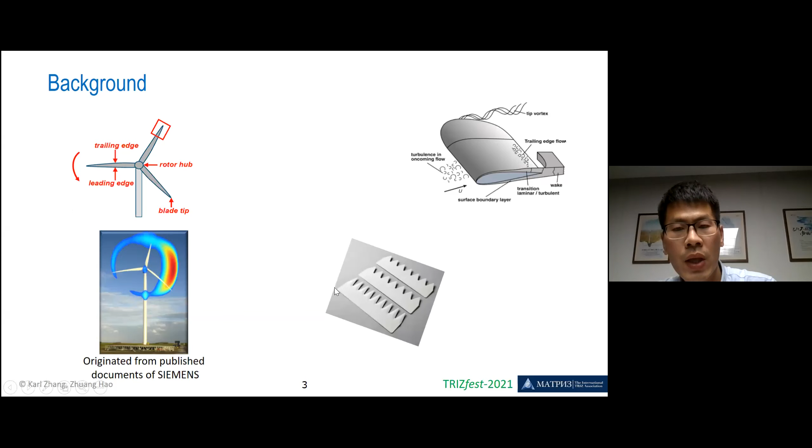But last year, a competitor's patent caught our attention. It adds more details to the normal add-ons. We can call it serrations. There are some more details, and it claims that it can further reduce the noise.

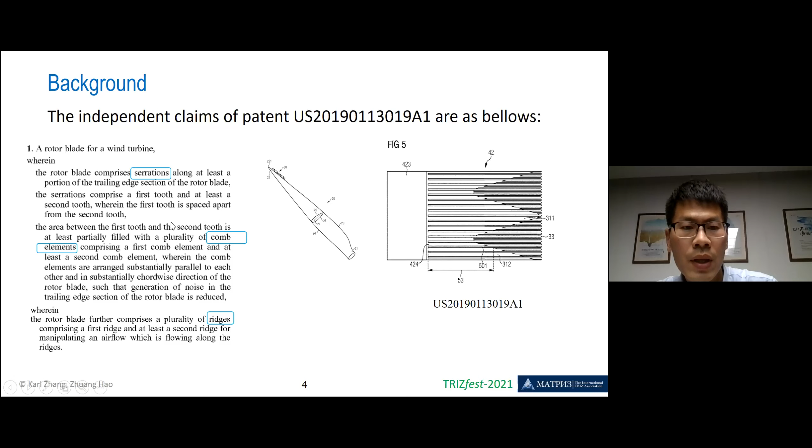So we decided to take some action. First, we read the independent claim from the competitor patent, and the patent number is shown here. Through the independent claim, we should select what components are contained in it. So we identified all the components, and the rules are the same as we learned in the function analysis.

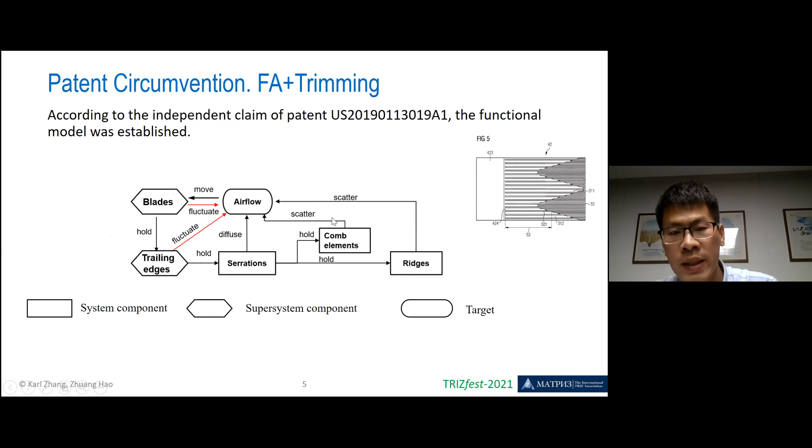Next, according to the independent claim, we built the function model. Here we can see the components mentioned in the independent claim are contained in our model. And of course, for our convenience, we can select some system components altogether. When we are doing patent circumvention, in fact, we don't need to consider whether the function is harmful, insufficient, or excessive, because that's not our aim to solve it. But here, I show the harmful function.

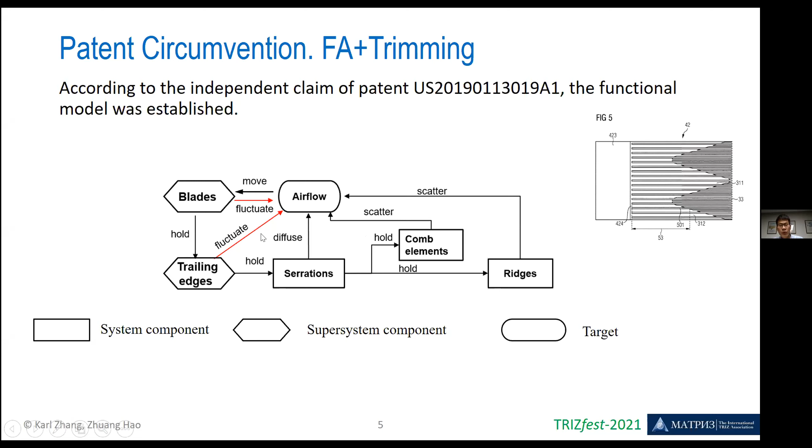When we are performing patent circumvention, trimming is the first tool that we can use. Here we can see there are only three components: serration, comb element, and the ridge. Of course, the functions are described in the patent, and we can easily add it to our model.

Serration are used to diffuse airflow. Comb element and the ridges are also used to scatter the airflow further, so the turbulence will be lowered and the noise is also lower.

Because there are only three elements, what components should be trimmed? Serrations are a normal part of the design, so it's very difficult to trim.

Here we first choose the ridge as our target to trim. The function of the ridge is to scatter the airflow. If we trim the ridge, how do we retain its useful function?

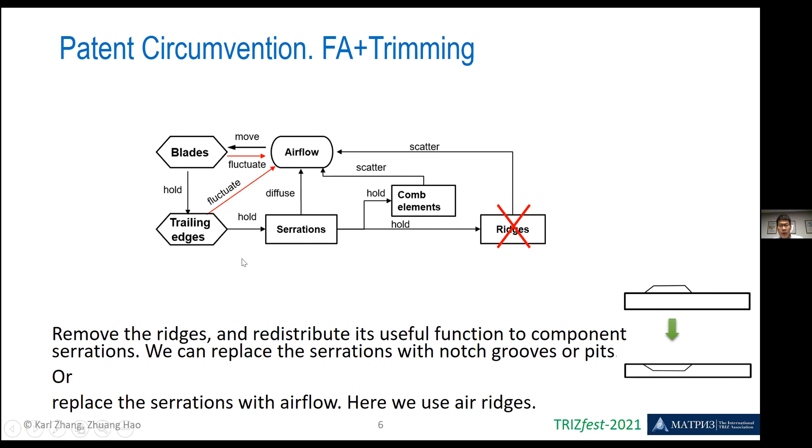Also, we can try trimming rule B. That means, how can the airflow itself perform the function of scattering itself? It's a new question we created by trimming, one that nobody else has ever thought about. How to realize it? We can see through this picture.

The blade contains a suction side and a pressure side, and the turbulence is mainly on the suction side. So how to scatter the turbulence on the suction side?

By the airflow itself. We didn't use the ridge. Instead, we use the airflow itself. We can make a through hole at the same place as the ridge.

So when the airflow goes around the surface of the blade, the air on the pressure side will go up to the suction side. It will create an air ridge, so the air itself will separate itself. Here we successfully used trimming rule B - we delegate its useful function to the airflow itself.

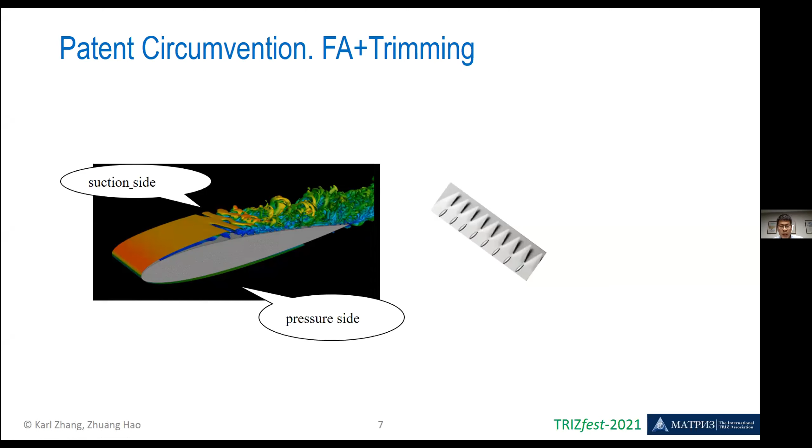Next, when we are doing a patent circumvention project, there are some attributes mentioned in the independent claim, like in some place, in what place, in what direction, or what shape. So we analyze the attributes in the independent claim.

It said that the serration are flat and along the trailing edge. If we change the attribute, can we get something good? Also for comb elements and ridges, we list all the attributes mentioned in the independent claim.

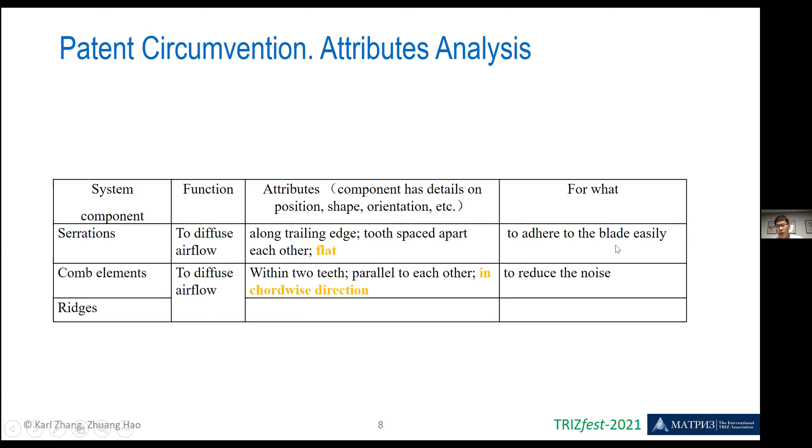We take serration as an example. In the independent claim, it said that the serration should be flat. We know from the detailed description of the patent that the serration should be flat in order to adhere to the blade easily. But we can easily think that if the serration were curved, it would withstand bending stress better. So here we get a physical contradiction.

By attribute analysis, we formulate the physical contradiction. How to solve it? Of course, we can use a separation method - a different type of separation. Here we applied separation in space. What space should the serration be flat, and what space should the serration be curved?

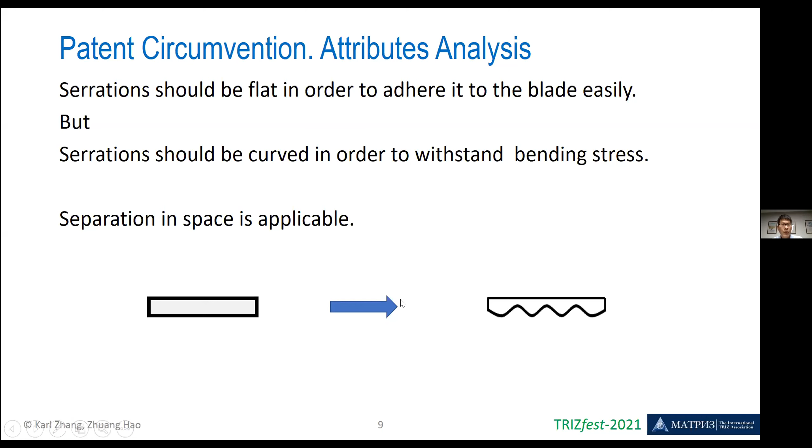In order to adhere to the blade easily, the upper side of the serration should be flat, and in order to withstand bending stress, the lower part should be curved. So in this way, we change the attribute of a component. Maybe the solution is patentable.

The next part is about another physical contradiction. The comb element should be in the chordwise direction to reduce noise efficiently, and the comb element should be downward against the chordwise direction for increasing the lifting force.

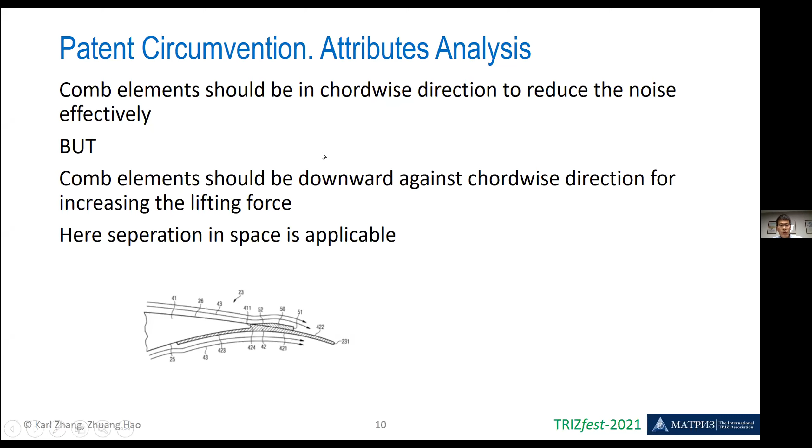Again, we use separation in space here. What space should be in the chordwise direction, and what space should be in the downward direction. And we generate the idea shown here.

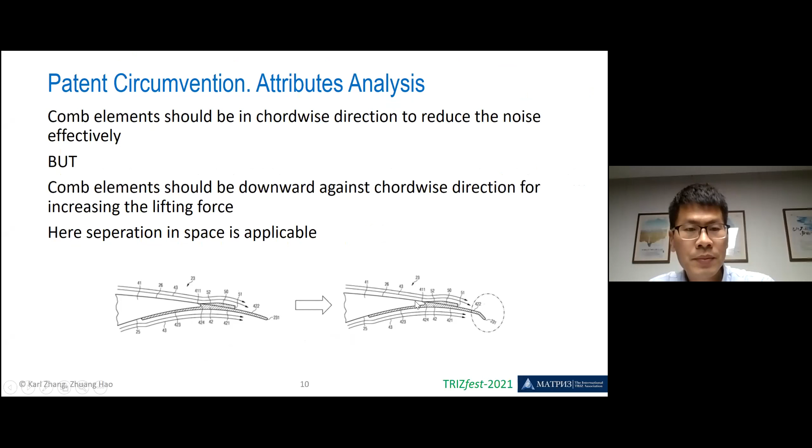And the next part is about how to strengthen our own solution, or how to build our own fence, in order to prevent others from circumventing our own patent.

Without doubt, trends are the best tools. We learned different trends in my MATRIZ level 3 training. Here, I applied one of the trends transition to the super system. There are 4 sub-trends in this slide, I think everybody knows it very well.

By this trend, we try to add more details to our node solution. First, the first sub-trend said that parameters of the integrating system become increasingly different from those of the engineering system. In the initial solution, all the teeth are of the same size, of the same shape.

How about changing the shape and the size? So here we get teeth with different shapes. Maybe it will generate good things, maybe not.

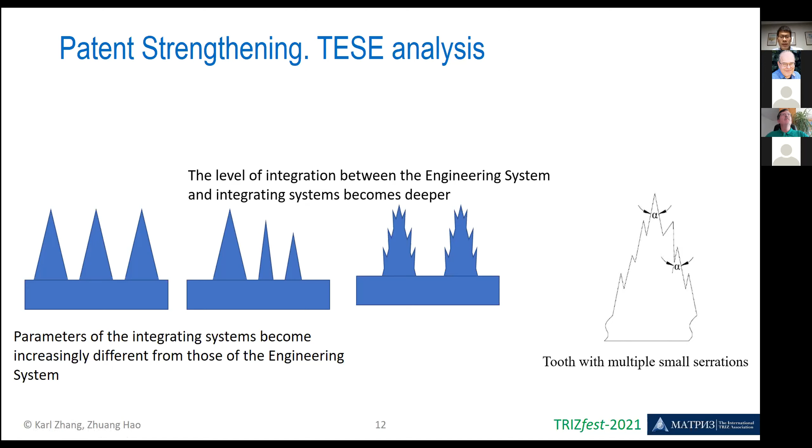Next, we also use MPV identification to identify what features, what functions can be added to our system. First, we also built the function model in its usage stage. Here, we didn't consider how to reduce the noise.

The add-ons, the serration panel, is glued to the trailing edge. So after several years, it will evidently drop. So one problem is how to solve it. When it falls, it may damage objects around, even hurt people.

This is a function model. We can see blade hold the serration parts, the function is insufficient. Also, air decelerate serration parts, the function is also insufficient.

Then we ask why, and build the cause-effect chain analysis model. We think it's very difficult to solve how to glue the serration parts firmly. But we think in another way, where the wind resistance is small. So how to increase the wind resistance?

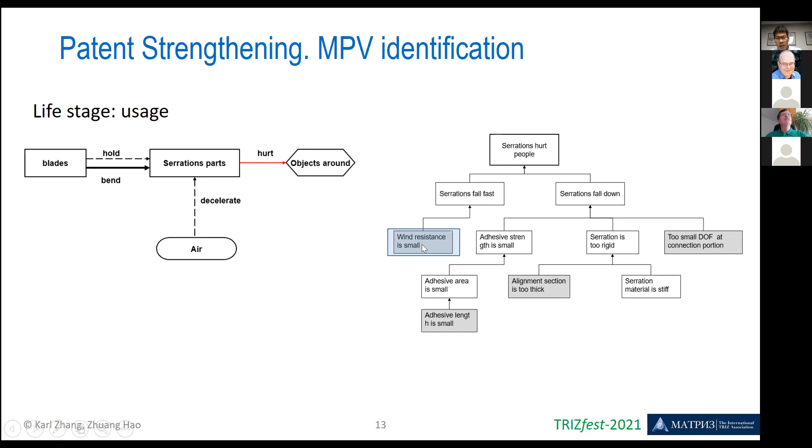According to this key disadvantage, in order to increase the wind resistance, we should change the shape of the add-ons. One easy way is to change the center of gravity. This is the original design, and the new design...

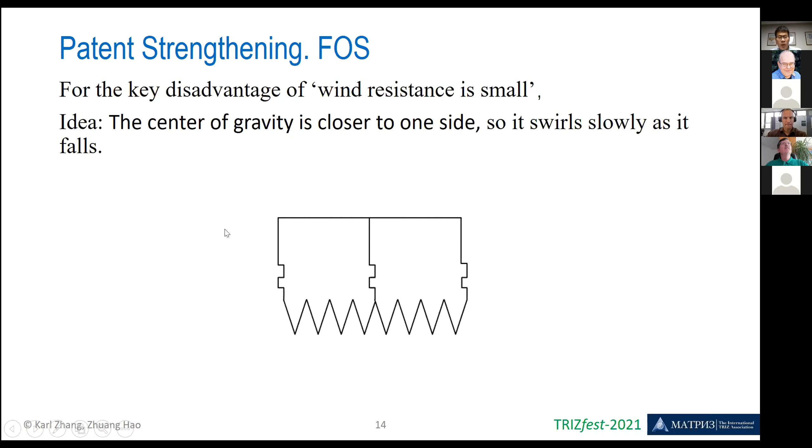The center of gravity is moved to one side, so it will swirl as it falls, so its dropping speed will be lower. And we test one of our solutions.

The solution with multiple small teeth tested in this way. Line 1 shows the blade without any add-ons, and line 2 indicates the blade with initial design of serration. The bottom line represents our new design. So we can see that the noise reduction is very effective.

It proves that it does work well. Yes, this line indicates our new design effect.

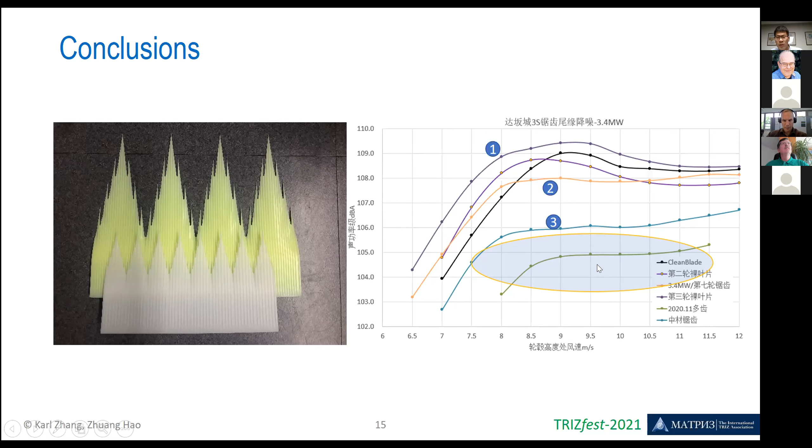Okay, in the end, I want to say thank you to Sergey and Alex. They gave me a lot of help in my project. Okay, that's all, I'm glad to answer any questions if you have. Okay, thank you.